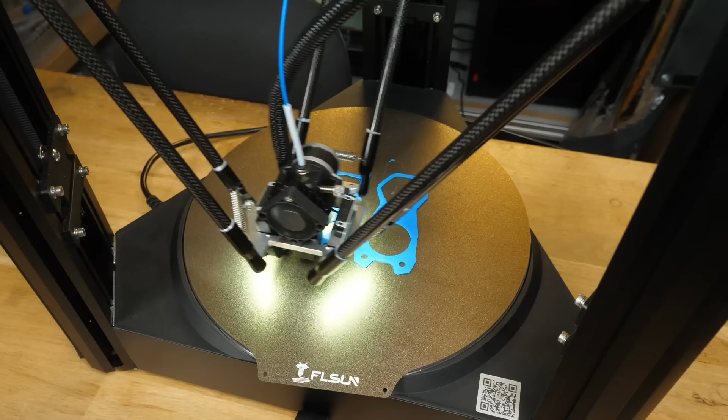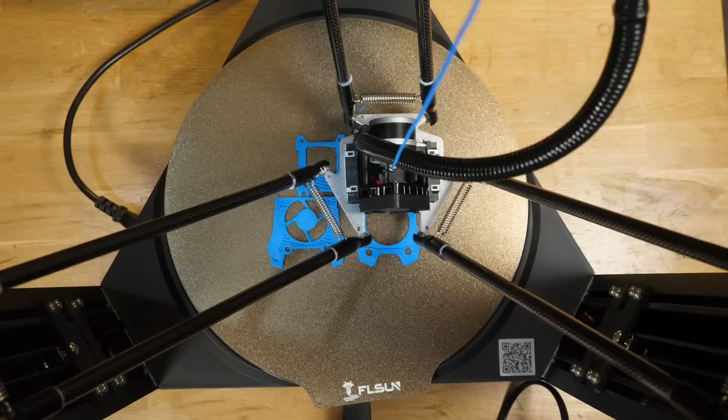If you want your 3D printer to be fast, you need a motion system which can move as quickly as possible and an extrusion system that can push and melt plastic fast enough to keep up. Whichever is slower will determine the maximum speed you can print.

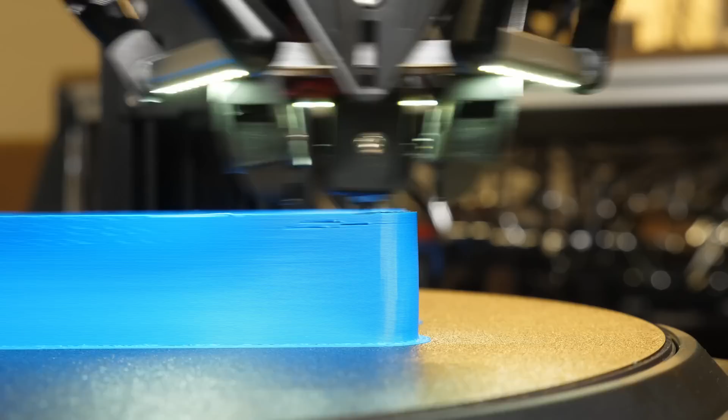Flsun seemed to understand this when they designed the V400, since it has a high flow hot end and delta kinematic system boasting an advertised print speed of 400 mm per second. But unfortunately, marketing numbers and reality often don't quite see eye to eye. Have Flsun overestimated their printer, or could it possibly be that they've left performance on the table? Today, I'm going to test the maximum capabilities of the V400 to find out how fast it can really go.

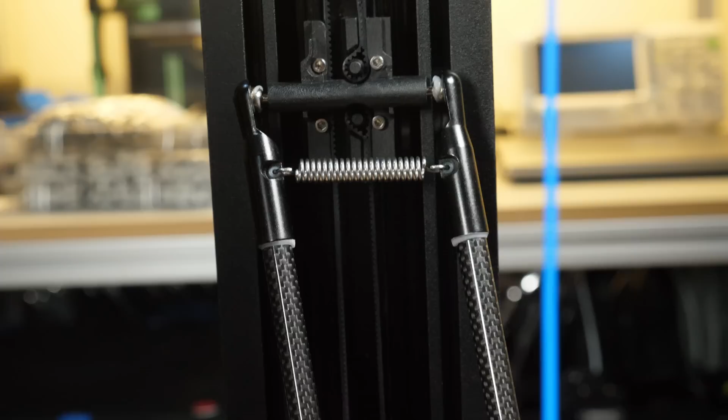Unlike the classical motion systems used on 3D printers, where a single motor drives a single direction, the V400 uses a delta kinematic system where 3 independent motors move carriages vertically, which in turn attach to linkages and the effector or tool head. The result of this is a low moving mass, which should mean high acceleration.

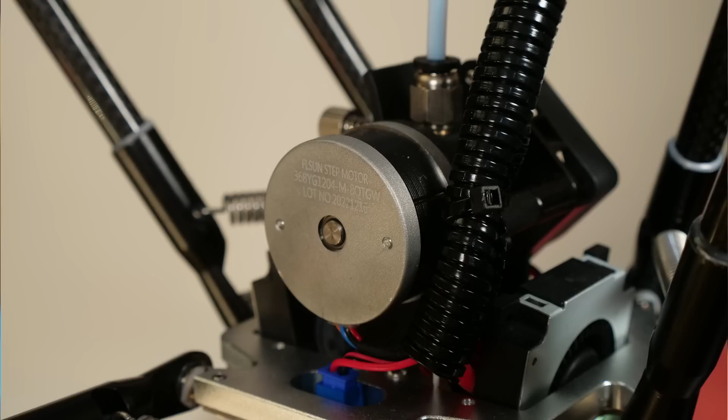On the extrusion side of things, the hot end is similar to an E3D volcano. It has an elongated melt zone, providing greater surface area for melting filament, compared to a standard design. The extruder is based on a Bondtech BMG using their dual drive system and a similar gear ratio, but instead using a round NEMA 14 motor.

First, I'll test the Delta style motion system for maximum speed and acceleration, and then the extrusion system for maximum flow rate. From that, we'll identify the optimum performance of the V400.

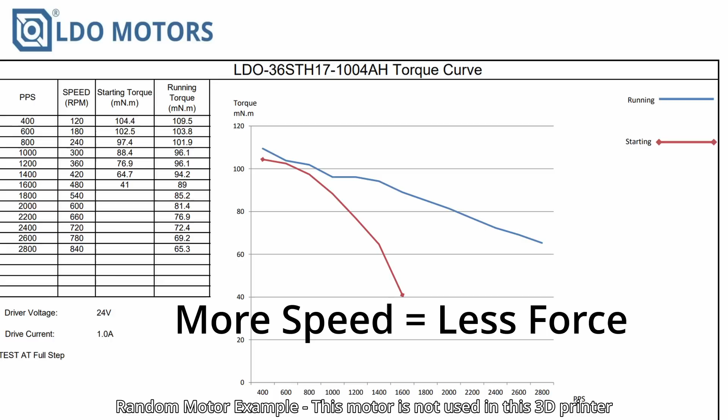When testing for maximum performance, it's important to understand that stepper motor force varies with speed. Therefore, we have to balance speed and acceleration. So our testing will find how they relate to one another.

So to test the motion system, I'm going to use the large small pattern method. This test is based on an open source Klipper macro by Andrew Ellis, where the toolhead moves through a large cross box pattern and then a small cross box pattern. That original macro has been enhanced for my testing today to test a full range of speed and acceleration values with a single command. I'm going to test speeds from 300 to 1200 mm per second.

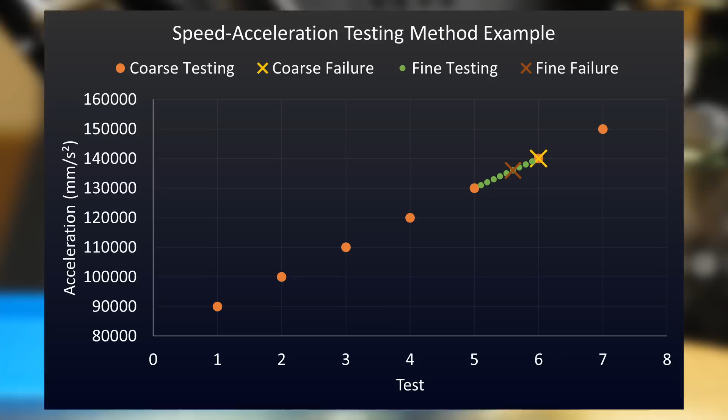For each speed, I'll first test a large range of accelerations in steps of 10,000 mm per second squared, testing 2 iterations at each step. Once that test fails, I then repeat the search in a smaller area near to the failure with 1000 mm per second squared steps at 10 iterations each. The final value is the last successful test before failure, which then should be accurate to 1000 mm per second squared. At higher speeds, I'll also increase the small pattern size a little to allow the toolhead to reach maximum speed. These are the results.

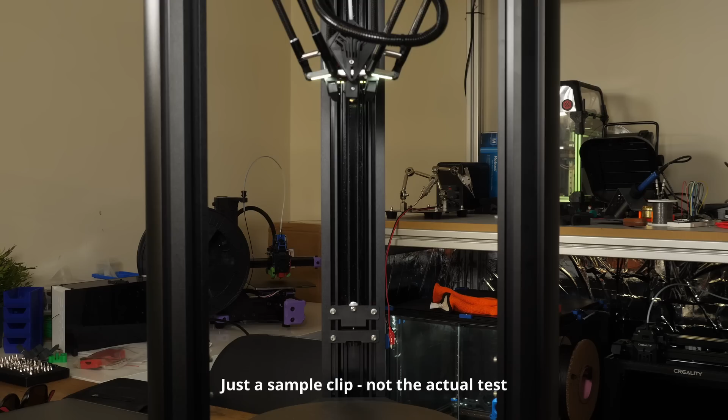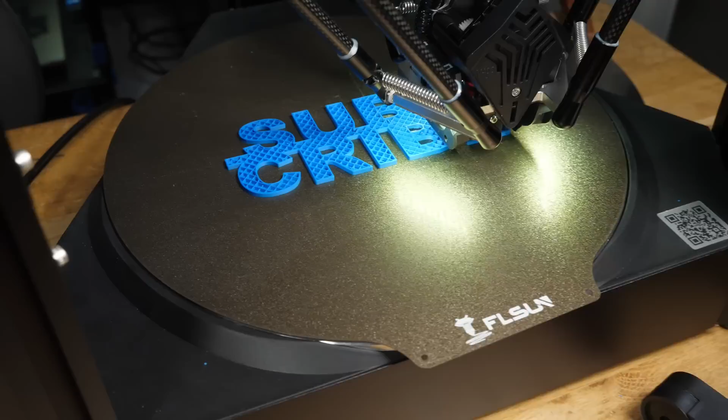The most important thing to understand with flow rate testing is that it's not the same as printing speed. Flow rate is plastic volume through the extruder per second, which is independent of the line width and layer height.

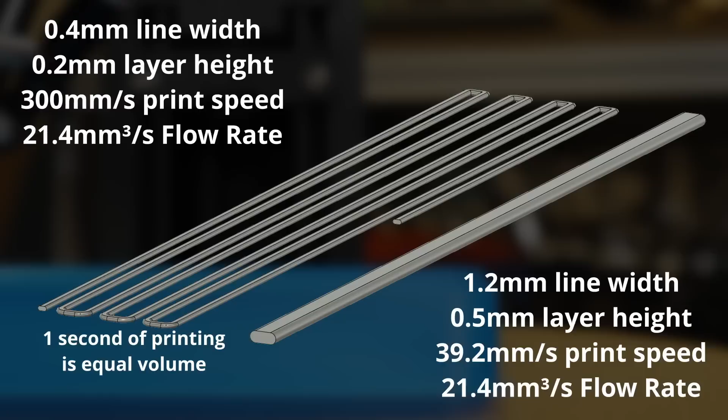As an example, a 0.4mm nozzle with a 0.2mm layer height printing at 300mm per second results in a flow rate of 21.4 millimeters cubed per second. Likewise, a 1.2mm nozzle with a 0.5mm layer height printing at just 39.2mm per second also has a flow rate of 21.4mm cubed per second. There you can see a different width, height and speed, but identical flow rates.

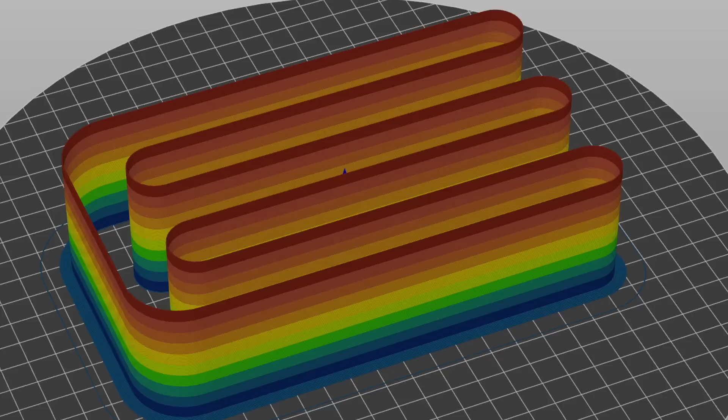The test I'm going to run is a single wall test similar to what you can find in the recently popular Orca slicer. My slicer is set up to use 0 top and bottom layers, 0 infill, 1 perimeter, and a brim for bed adhesion.

As the Z height increases, the printing speed is increased corresponding to our selected flow rates, from 5mm3 per second up to 50mm3 per second at the top. I printed it in ABS with a temperature of 250 degrees Celsius, a 0.45mm line width, and a 0.3mm layer height. This is the final print.

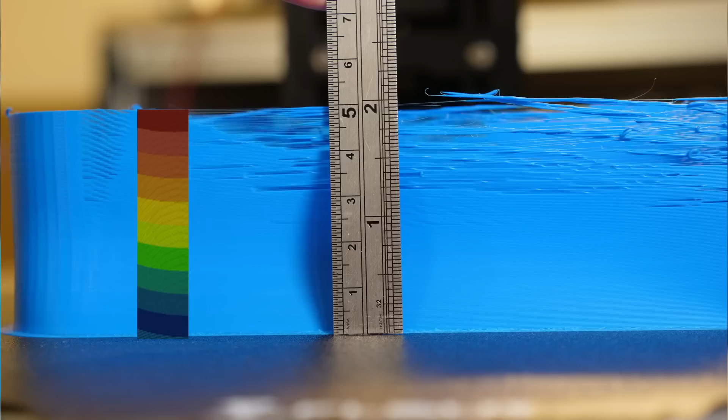Looking closer at the middle of the print, the limit for this hot end and extruder combination seems to be around 20 to 25mm3 per second. I'd estimate that it's around 22.

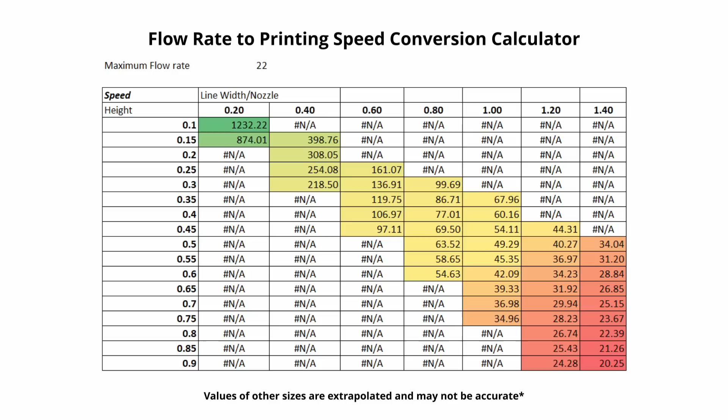Using a flow rate to print speed calculator that I designed myself, and inputting the flow rate at 22, we can see all the limits for typically recommended layer heights and widths for typical nozzle sizes. Notably, a 0.4mm nozzle with a 0.15mm layer height is almost exactly 400mm per second, the quoted maximum speed for the V400.

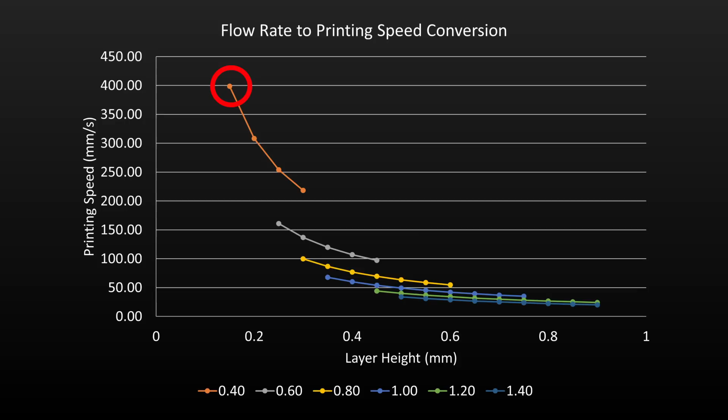Before we make any conclusions, there are a couple of limitations of this flow rate test to consider. Firstly, it's a combined test, since the hot end is moving around to maintain a specific flow rate. Because of this, it has to slow down for corners, which gives the hot end a bit of a chance to catch up in the event that it was struggling on the high-speed straight sections. This does make it a bit more realistic for some printing scenarios, as you're likely to be creating complex shapes, but it does slightly increase the indicated performance because of the reduced corner speed.

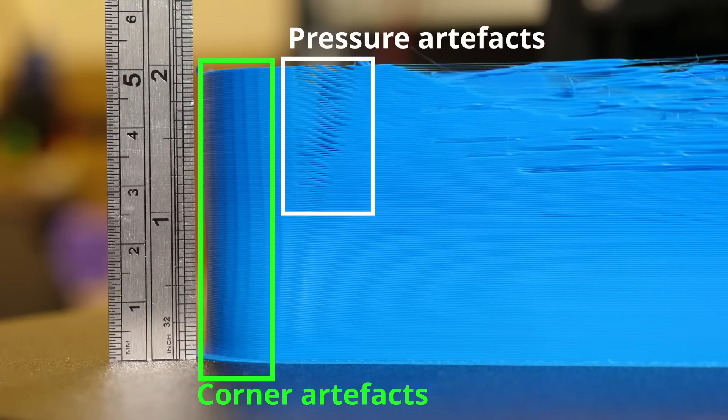The other effect which we have to consider is that during acceleration, the nozzle pressure will be increasing or decreasing, which again has effects on flow rates and can over or under extrude at the start and end of the straight sections, again making results a little bit less clear.

So what does this all mean for the V400, and how fast should you be printing? Starting with acceleration, if you want a set and forget value, something in the range of 10 to 15,000 mm per second squared should be about fine for pretty much any nozzle size and printing speed that you decide to use. That being said, print quality at these accelerations may be decreased, so I'd recommend setting any external parameters, the top layer and bottom layer, to whatever is the recommended acceleration value from your input shaping results, as this should net you the best quality.

If you're only ever using the included 0.4mm nozzle, you are going to be limited to about 400mm per second. So as a result, you could bump up accelerations to something like 100,000 mm per second squared if you wanted to. But again, ensure that you set quality optimized values for external features.

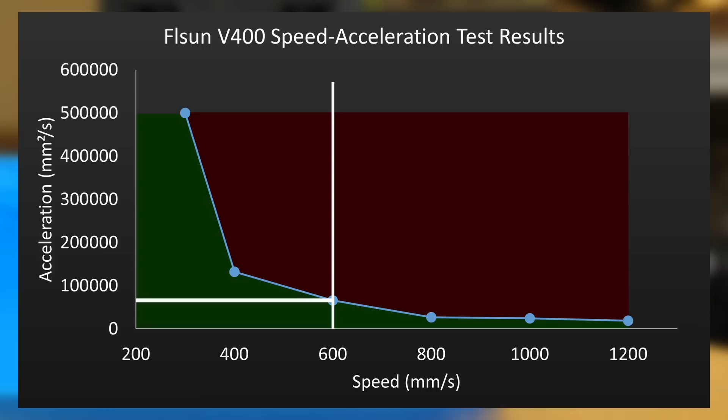However, if you're interested in some very minor modifications, like switching the nozzle out for a CHT type, you could potentially boost your 0.4mm nozzle printing speeds up to around 600mm per second, with accelerations set to around 40 to 60,000 mm per second squared, giving you pretty insane printing performance.

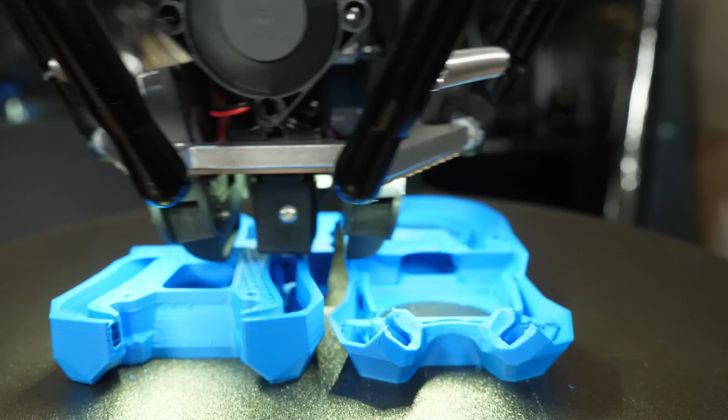So in conclusion, while my tests indicate that 400mm per second is an appropriate maximum speed, the stock acceleration values of between 4 and 7,000 mm per second squared are actually very low compared to what this machine is capable of. Remember though, your printing will only ever be as good as the weakest link. So if you're printing small objects, you may also wish to increase the cooling.